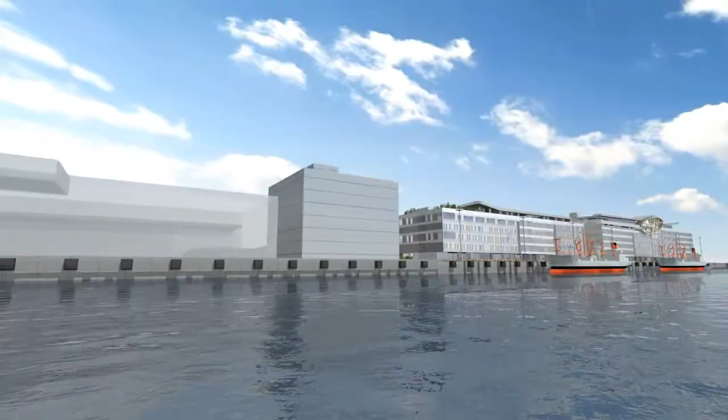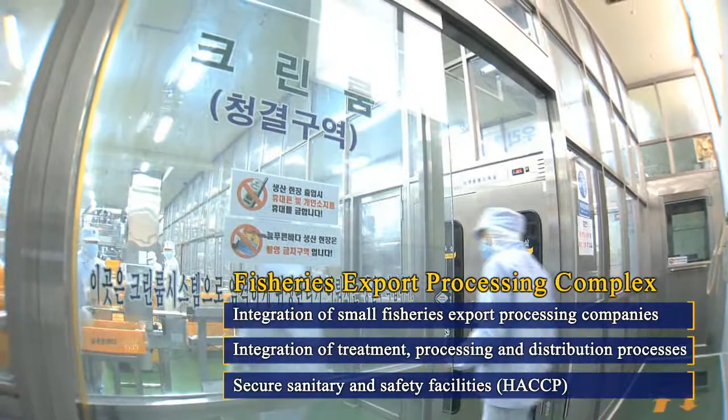The Fisheries Export Processing Complex is part of a three-phase project to develop an international fisheries distribution base at Gamcheon Port. The project aims to respond flexibly to the fast-changing international trade environment and to revitalize the local economy through the integration of small and large businesses in the export processing industry. These initiatives involve the systemization of handling, processing, and distribution to cut logistics cost and ensure hygienic facility.

For the smooth importation of raw materials and the exportation of manufactured products, as well as the improvement of fisheries-related industries, the Fisheries Export Processing Complex has been strategically placed next to the Busan International Fish Market.

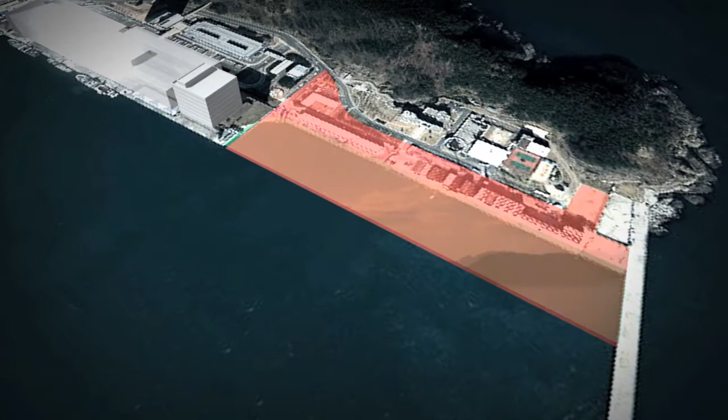First, to facilitate land and sea transportation, the body of water shared with the International Fish Market has been filled to create shared port facilities.

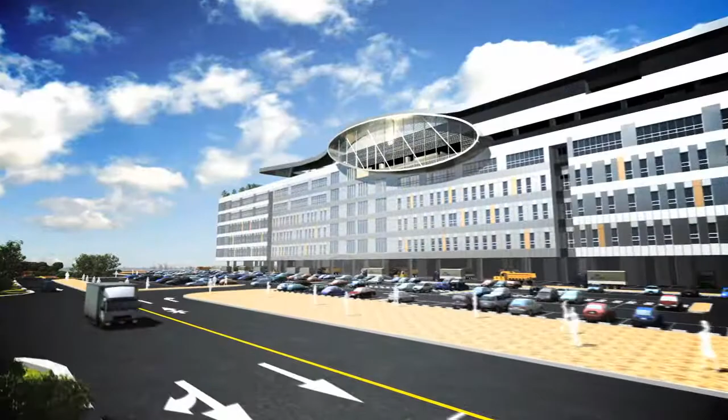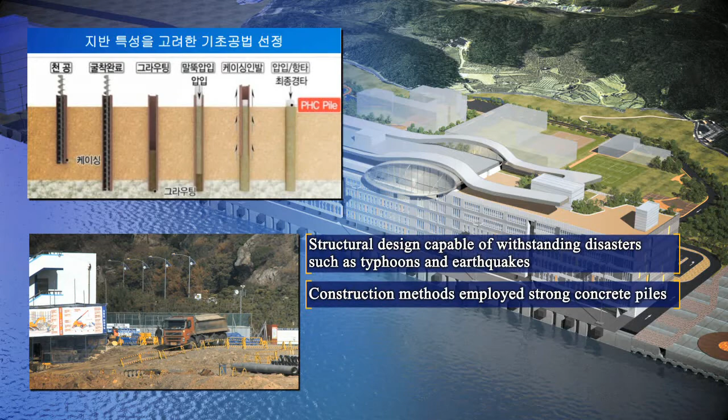Optimal structural construction methods have been utilized in this process in order to ensure maximum safety while facilitating an environmentally friendly, cost-effective execution of port functions. These structural elements include typhoon and earthquake-resistant construction, strong concrete piling methods that took into consideration the characteristics of the ground here, and methods to prevent chemical contamination.

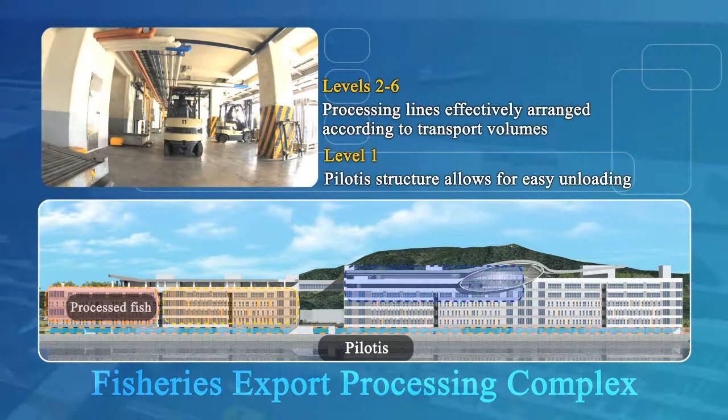In addition, the processing plant takes into consideration the different characteristics of specific industries, and this raises its efficiency in terms of production and transport. While the Pilotis structure of the first floor facilitates unloading, the strategic placement of various processing units on floor levels 2 to 6, according to transport volumes, ensures effective circulation.

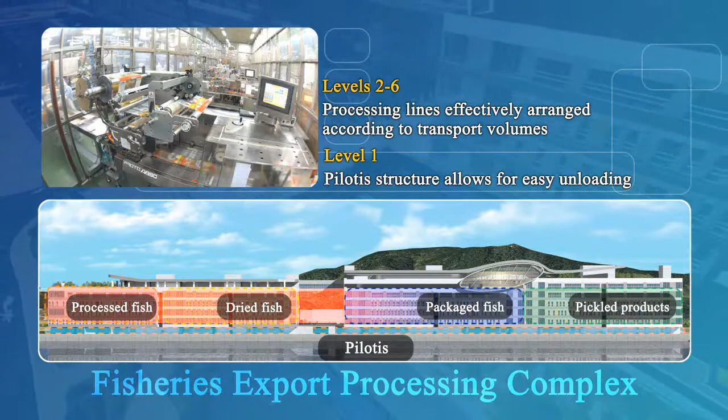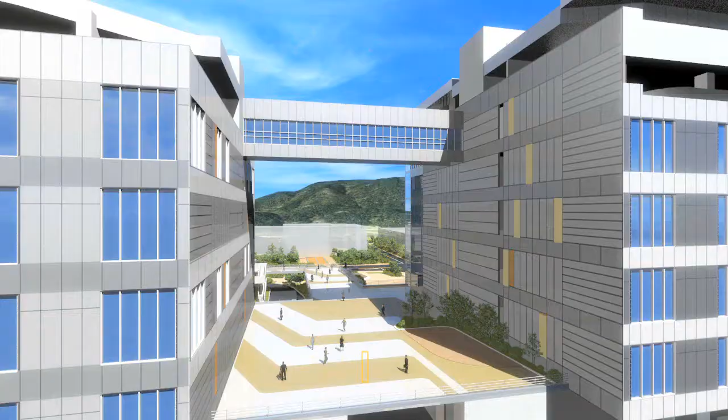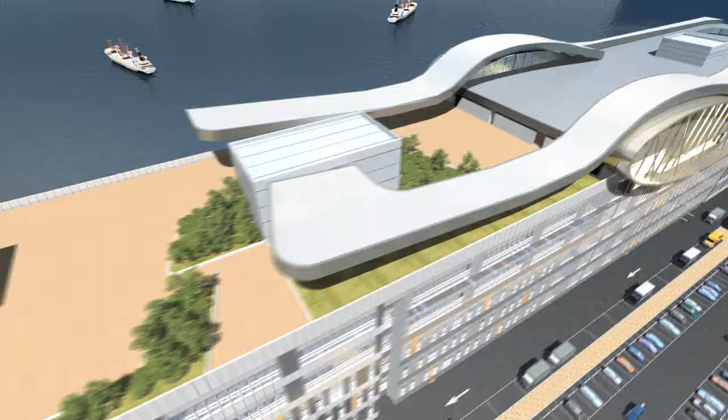With its open deck welcoming visitors, the ocean core that represents the fruitfulness of the sea, and a roof that has been constructed to represent the natural flow of the waves, the pleasant nature-inspired work environment at the Fisheries Export Processing Complex mimics the tranquility of the ocean.

The Fisheries Export Processing Complex is equipped with a futuristic unloading system that provides for the most optimal production and processing environment.

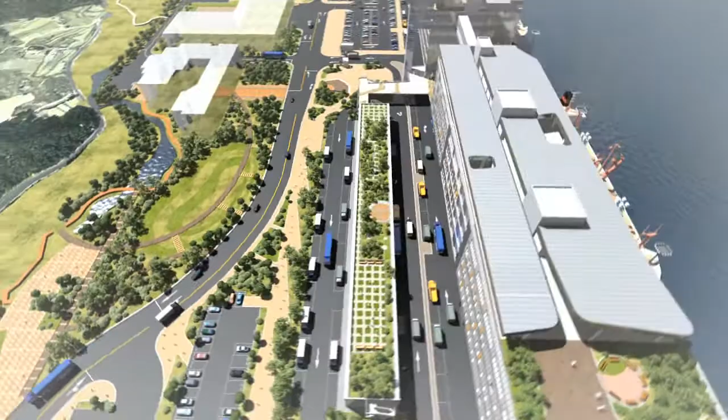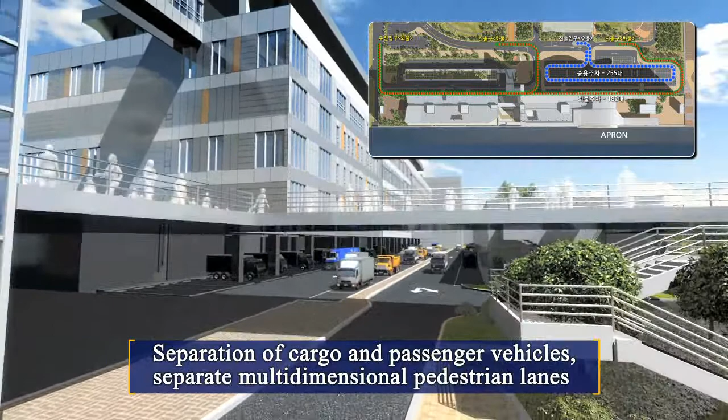Circulation enabled by the one-way system allows for rapid and simultaneous entry and exit of land and sea products. There are also designated areas for cargo and passenger vehicles, and separate multi-dimensional pedestrian lanes that provide for efficiency and safety at the same time. The creation of an expandable unloading dock that can adapt to changes in transport volumes is also in the making.

The most optimal distribution system for maximized processing is created via many additional functionalities. Promptness is ensured through the diversification of vertical distribution equipment and batch distribution, while the application of the cold zone and the sharing of storage space allows for lower cost, preservation of product freshness, and prevention of contamination. There is also a user-centric logistics information system and computational infrastructure in place that provides for enhanced security.

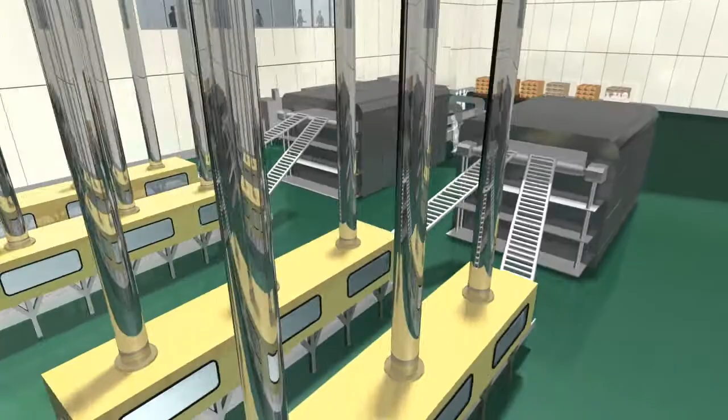For the construction of a sanitary processing plant that is both safe and reliable, the production line of the Fisheries Export Processing Complex is positioned in an I shape, in line with HACCP requirements.

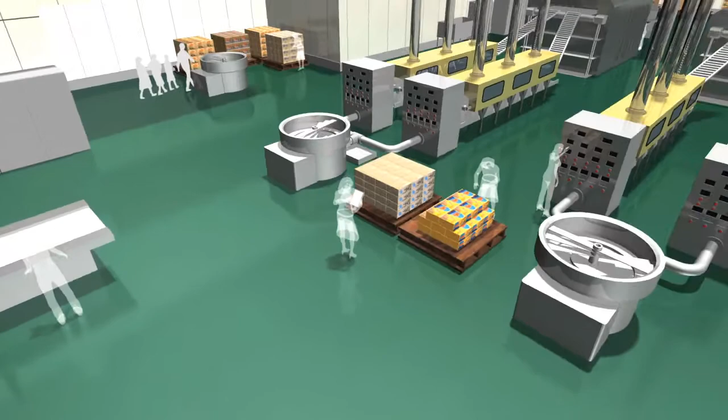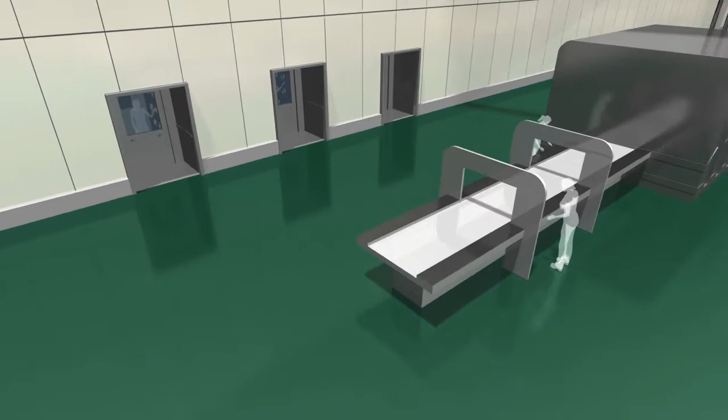A washroom with separate entrances and exits leads out to the various preparation, processing, and packaging departments, minimizing contamination between employees. A separate entrance for equipment also maximizes the use of available space.

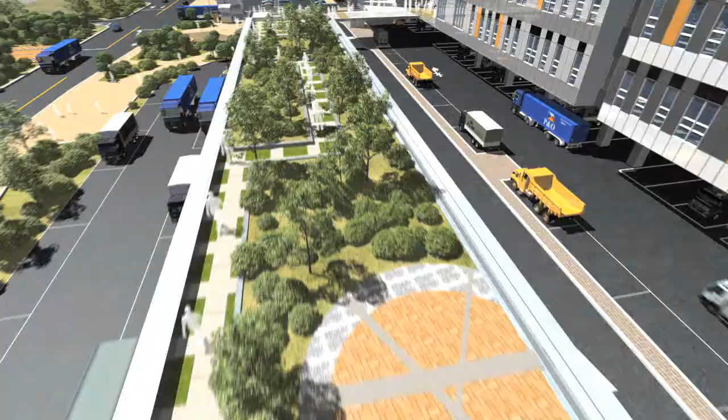The facility is equipped with a central pedestrian plaza, welcome plaza, ocean deck, and community garden, and these enable opportunities for rest and exchange between employees and visitors. Even the external environment of the facility was created with a green network and nature-inspired theme in mind for a pleasurable working environment.

The Fisheries Export Processing Complex guarantees the success of every in-house business. Through the use of our research center, conference room, and exhibition room, we will do our best to offer you a one-stop service in all areas including consulting, financial, and operational management support.

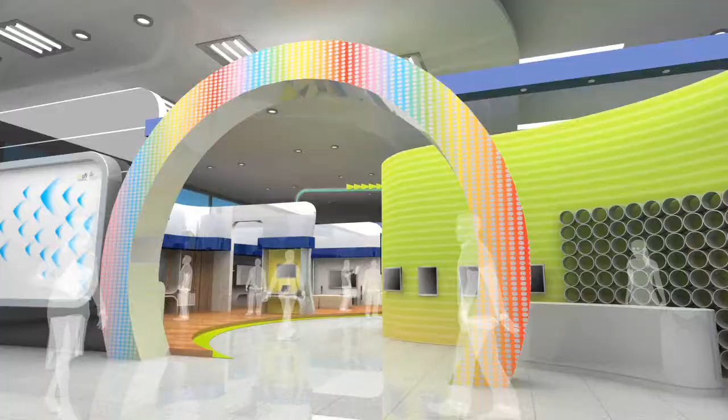We will also do our best to offer various types of services that provide for stable publicity and sales, including experience-based exhibitions and the marketing of locally produced goods.

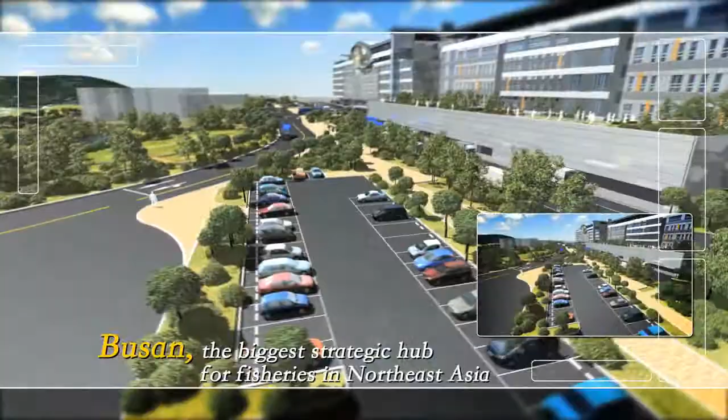With the construction of the Fisheries Export Processing Complex in 2013, Busan is becoming the biggest strategic hub for fisheries in Northeast Asia. A new era in the fisheries processing industry. A one-stop system in fisheries processing. The Fisheries Export Processing Complex.

With the Fisheries Export Processing Complex, Busan, a city of fisheries and maritime affairs, is establishing a new paradigm as a leading hub of the international fisheries trade.